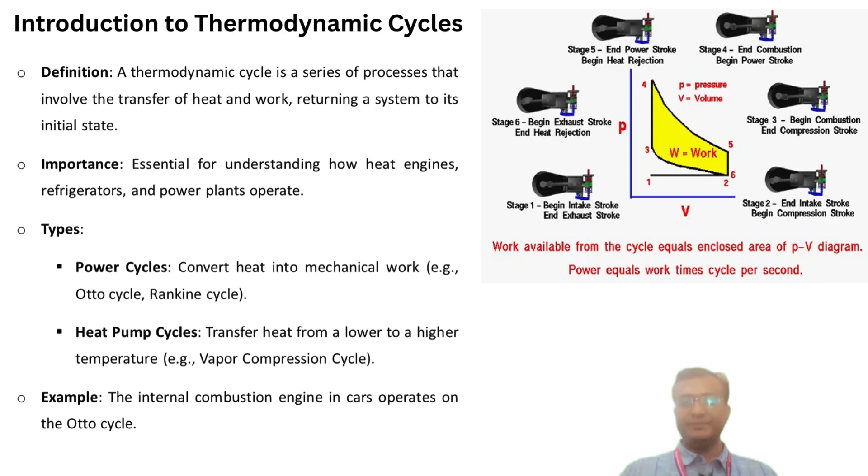Now, let's see the core principles behind thermodynamic cycles. First, these cycles are closed loops, meaning the system, like a gas or steam, returns to its initial state after completing all processes. This allows the cycle to repeat indefinitely, producing consistent work or heat transfer.

The first law of thermodynamics is our starting point. It states that the net heat added to the system equals the work done, or Q net equals W net. In simple terms, energy in equals energy out, accounting for heat and work. For example, in a car engine, the heat from burning fuel produces work to move the pistons.

Next, the second law of thermodynamics comes into play. It tells us heat naturally flows from hot to cold regions, and no cycle can be 100% efficient. The Carnot efficiency sets the theoretical maximum efficiency, limited by the temperature difference between the heat source and sink.

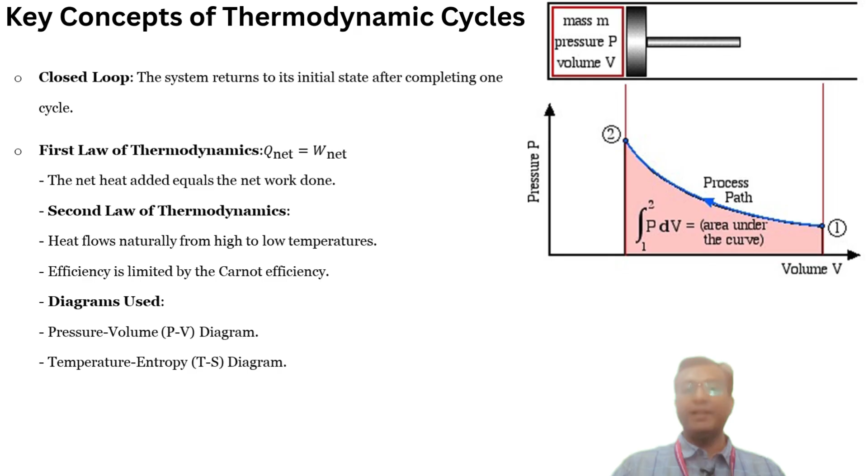Now we will shift to the power cycles, which are all about converting heat energy into mechanical work. These cycles are the heart of systems like car engines, power plants, and jet turbines. So what is their main goal? To take the heat from a source like a burning fuel and turn it into useful work, such as spinning a turbine or moving a piston.

There are several key power cycles we will cover today. The first is the Otto cycle, which powers gasoline engines in most cars. Then the Diesel cycle, used in trucks and heavy machinery for their durability. The Rankine cycle, which drives steam power plants like those in coal or nuclear facilities. Finally, the Brayton cycle runs the gas turbines and the jet engines propelling planes and generating electricity.

Each cycle has a unique process, but they all aim to maximize the work output. We measure their performance with efficiency, defined as the net work output divided by heat input, which equals W net divided by Q in. Higher efficiency means less wasted energy, which is critical for cost and environmental reasons. For example, a more efficient Otto cycle in a car means better gas mileage.

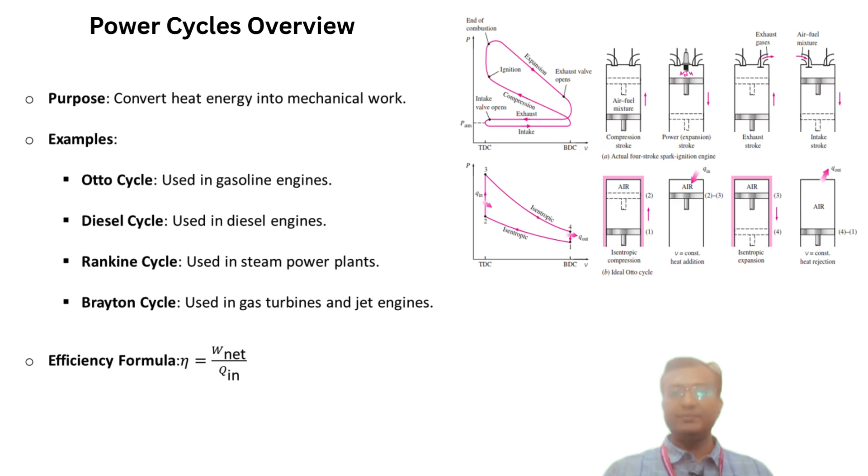Now we will explore heat pump and refrigeration cycles, which do the opposite of power cycles. Instead of converting heat to work, these cycles use work to transfer heat from a cold region to a warmer one. Think of your refrigerator or air conditioner. Their purpose is to move heat against its natural flow, which requires energy input, usually electricity.

The most common example is the vapor compression refrigeration cycle found in fridges, freezers, and AC units. It uses a refrigerant that evaporates to absorb heat from a cold space and condenses to release it elsewhere. Another type is the absorption refrigeration cycle, often used in industrial settings or off-grid systems.

To measure performance, we use the coefficient of performance, or COP. For a heat pump, COP is the heat delivered to the warm space divided by the work input. For a refrigerator, it is the heat removed from the cold space divided by the work input. A higher COP means better efficiency: your fridge uses less electricity to keep food cold. For example, a modern AC unit might have a COP of 3, meaning it moves 3 times more heat than the energy it consumes.

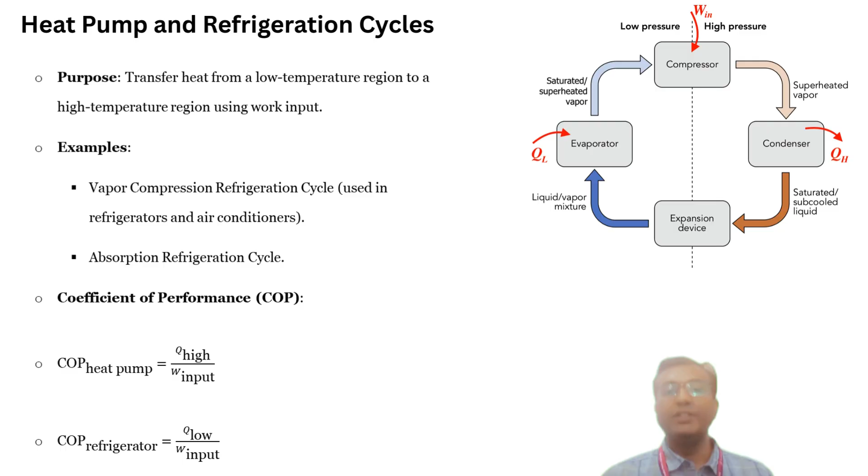These cycles rely on components like compressors and evaporators, and we analyze them with PV or TS diagrams to optimize performance. In a fridge, the cycle keeps the inside cold while dumping heat into your kitchen. Understanding these cycles is key to designing energy-efficient cooling systems, which are vital for comfort and food preservation. Next, we will zoom in on the Otto cycle to see how a specific power cycle works in a gasoline engine.

Let's take a closer look at the Otto cycle, which is the powerhouse behind gasoline engines in cars. This cycle is named after Otto, and it's what makes your car go. It's an air standard cycle, meaning we simplify it by assuming air is the working fluid. The Otto cycle consists of 4 distinct processes. The first is the isentropic compression process, where the piston compresses the air-fuel mixture, raising its pressure and temperature without heat loss.

Second is the constant volume heat addition. The spark plug ignites the mixture, adding heat rapidly at constant volume, spiking the pressure. The third is the isentropic expansion, or the power stroke. The hot gases expand, pushing the piston to produce work. Finally, the constant volume heat rejection, where the exhaust valve opens, releasing the heat as the system cools back to its starting state.

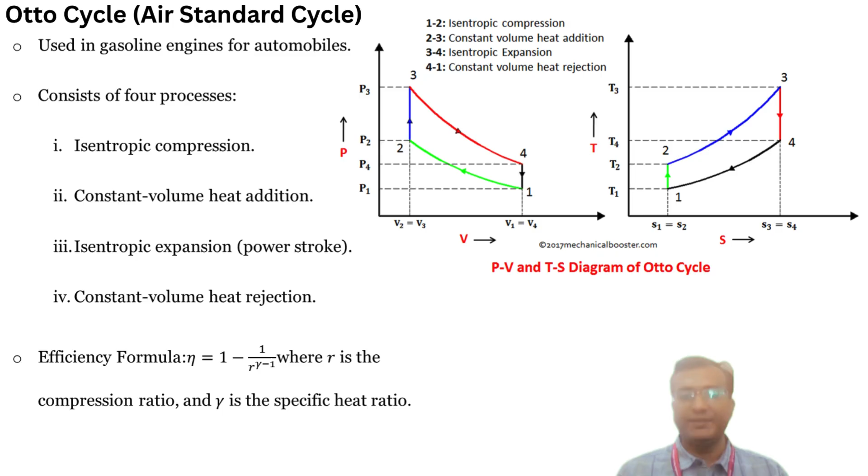Now, let's see the Rankine cycle, the workhorse of steam power plants. Think coal, nuclear, or geothermal facilities. This cycle is crucial for generating most of the world's electricity. Unlike the Otto cycle, the Rankine cycle uses water and steam as its working fluid. It consists of 4 main processes.

The first is isentropic expansion in a turbine. The high pressure steam expands, spinning the turbine to produce work. This is where the cycle generates electricity. The second is heat rejection in a condenser. The steam cools and condenses into liquid water, releasing heat to the environment, often through cooling towers.

The third is isentropic compression. In the pump, the liquid is pressurized, requiring a small amount of work input. Finally, heat addition in the boiler. The water is heated and vaporized, turning back to high pressure steam to restart the cycle. The efficiency of the Rankine cycle is calculated as the net work output, that is the turbine work minus the pump work, divided by heat added in the boiler.

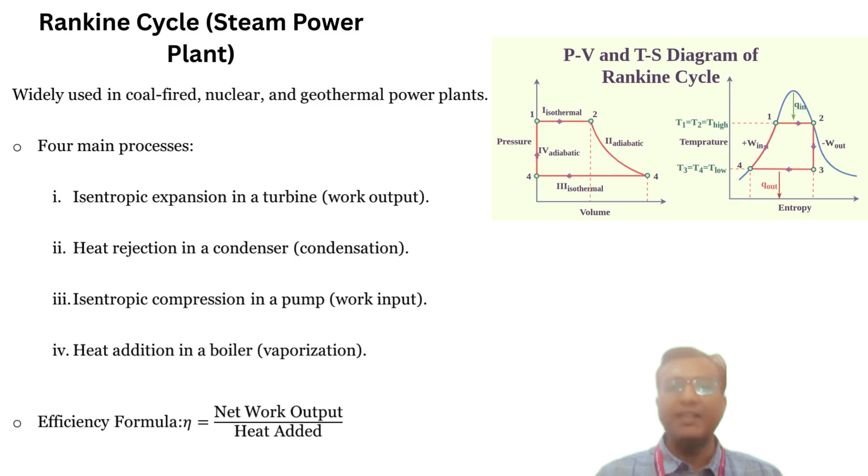Now let's see the Brayton cycle, which powers gas turbines and jet engines. Think of airplanes moving in the sky, or turbines generating electricity. This cycle uses air as a working fluid and operates at high speed, making it ideal for aviation and power generation. The Brayton cycle has 4 key processes.

The first is isentropic compression in a compressor. The air is drawn in and compressed, increasing its pressure and temperature. This takes work input, like squeezing a balloon. Second is constant pressure heat addition in a combustor, where the fuel is burned, heating the air at constant pressure and significantly raising its temperature.

The third is isentropic expansion in a turbine. The hot, high pressure gas expands, spinning the turbine to produce work, which powers the compressor and external loads like a generator or jet thrust. The fourth is constant pressure heat rejection. The exhaust gases release heat to the surroundings, cooling down before the cycle repeats.

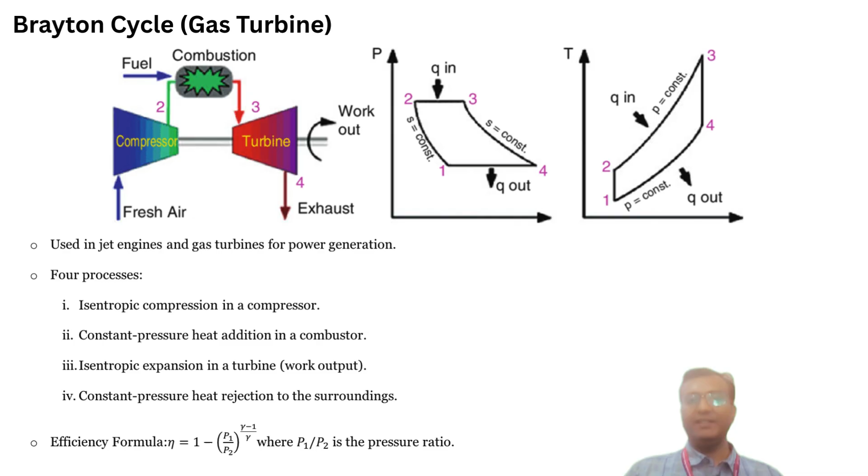Now let's look at tools such as TS and PV diagrams to analyze thermodynamic cycles. The TS and PV diagrams are the X-rays of engineering, revealing how cycles work and where energy flows. The first, the temperature entropy, or TS diagram, plots temperature against entropy, which measures disorder in the system. In a TS diagram, the heat transfer appears as the area under the curve.

For example, in the Rankine cycle, the TS diagram shows the heat added in the boiler as the large area during vaporization. It's also great for spotting efficiency losses, as entropy increases with irreversible processes like friction. A Carnot cycle, the gold standard of efficiency, forms a neat rectangle on a TS diagram, highlighting maximum heat to work conversion.

Now, the pressure volume or PV diagram is the go-to for work calculation. Here, the area enclosed by the cycle loop represents the net work done. In the Otto cycle, for instance, the PV diagram shows the compression and expansion strokes clearly, with the enclosed area equaling the engine's work output. These diagrams are especially common for internal combustion engines, where the piston moves in a defined volume.

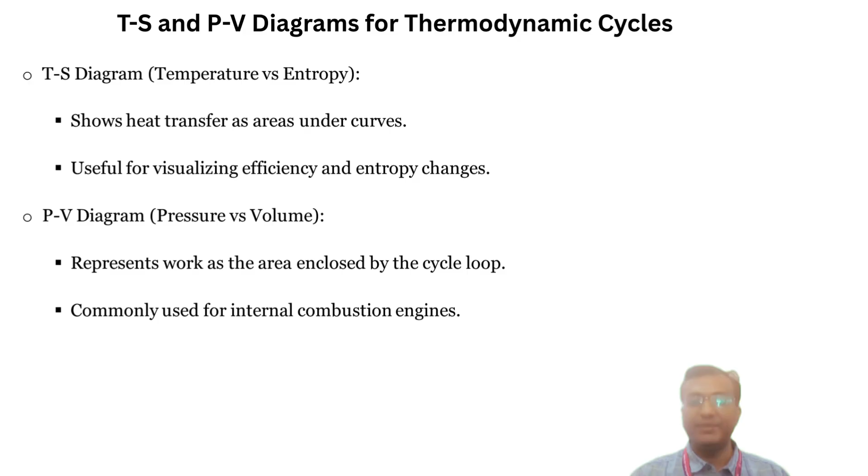Let's connect thermodynamic cycles to the real world, where they power our lives in countless ways. First, power generation relies heavily on these cycles. The Rankine cycle drives thermal power plants, that is coal, nuclear, or geothermal, converting heat into electricity that lights our homes. The Brayton cycle powers gas turbines, often used in combined cycle plants for efficient, flexible production. These cycles are critical for meeting global energy demands, while engineers work to boost their efficiency and cut emissions.

Now let's talk about transportation. The Otto cycle is the heart of gasoline engines powering most cars on the road. Every time you hit the gas, the Otto cycle four-stroke delivers power to the wheels. The diesel cycle, meanwhile, runs heavy-duty vehicles like trucks, buses, and ships, prized for its efficiency and durability under tough conditions. These cycles keep goods and people moving globally.

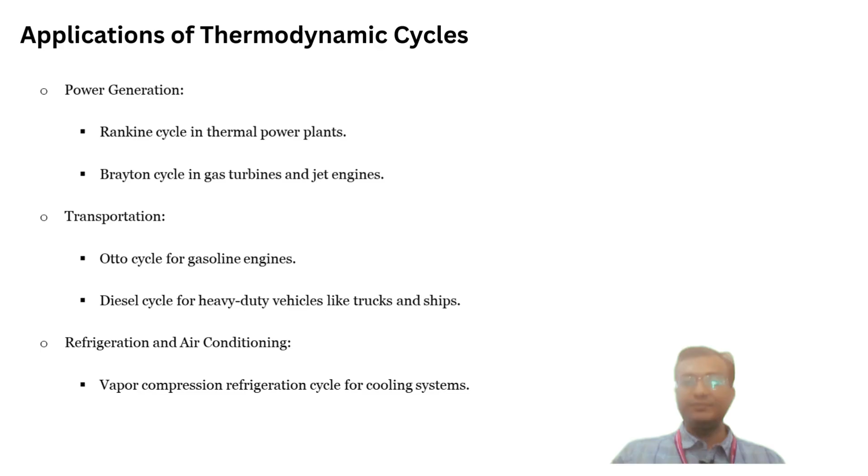Now, let's reflect on why thermodynamic cycles are so fundamental. These cycles are the invisible engines behind energy conversion systems, from the car's Otto cycle to the hum of a power plant's Rankine cycle. Power cycles like Brayton and diesel turn heat into work, driving turbines, jets, and vehicles that power our world. Meanwhile, refrigeration cycles like vapor compression defy nature by moving heat from cold to warm, keeping our homes comfortable and food fresh. Understanding these cycles isn't just academic, it's about solving real problems.

By analyzing PV and TS diagrams, engineers calculate work, heat, and efficiency, finding ways to do more with less energy. For instance, boosting a Rankine cycle's efficiency in a power plant cuts fuel cost and emissions, while a better Otto cycle means cars that go farther on a tank. The first and second laws of thermodynamics remind us that energy transformations have limits, but they also inspire innovations like hybrid engines or advanced refrigerants. These cycles connect theory to practice, helping us design systems that are sustainable and efficient.